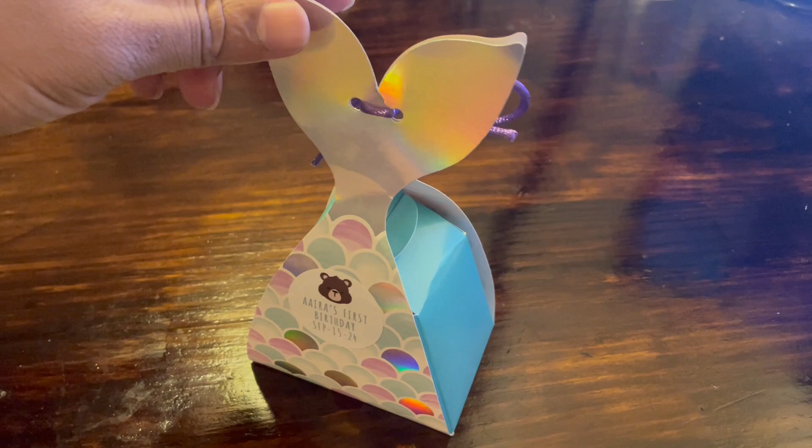Today, I think I'll be working on a new workbench, at least new for my channel. So this is a gift box that my daughter got from a party the other day, and then my wife was asking me, can you model this in your new software? And I said, yeah, I will give it a try.

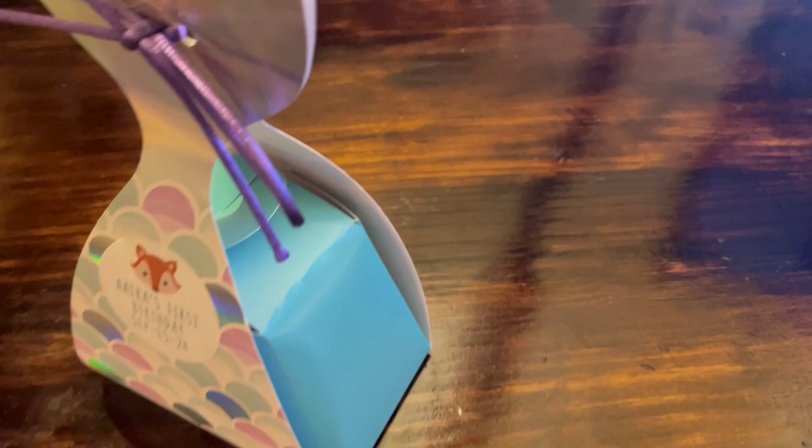So what I want to do is build this box, and it will be done in the SheetMetal workbench. If you don't have the SheetMetal workbench already installed and you'd like to follow through, please go ahead and install it from the add-on manager and just search for SheetMetal, and there it is, SheetMetal workbench. Select it and install it right here, and then you will have to restart the software.

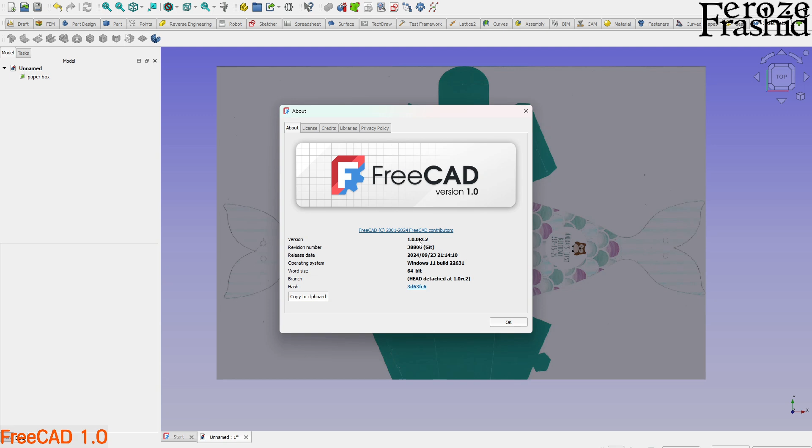Today I am using the new release candidate for FreeCAD version 1.0 release candidate 2, and with that, let's talk about the SheetMetal workbench. So let's forget about these for a minute and let's see how it works.

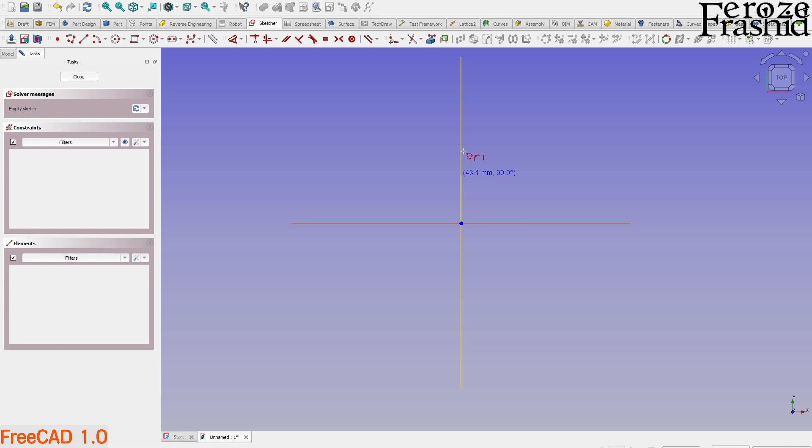I'm going to go ahead and make a very simple sketch. I don't want to make it a rectangle, I want to make it not a regular shape sketch, right? And then I want to extrude that. Because it is a sheet metal, supposed to be very thin, I'm gonna say 0.5 millimeter. This is a trial run. All right, so that's a very thin sheet metal, and we want to bend it somewhere here.

So we'll have to draw a line where we want to bend it, and we can do that in the Draft workbench, or just draw another sketch. Some people are very proficient in the Draft workbench; that comes easy for them. For me, I'll just draw another sketch. Say I want to bend that somewhere here parallel to the edge, something like this, right?

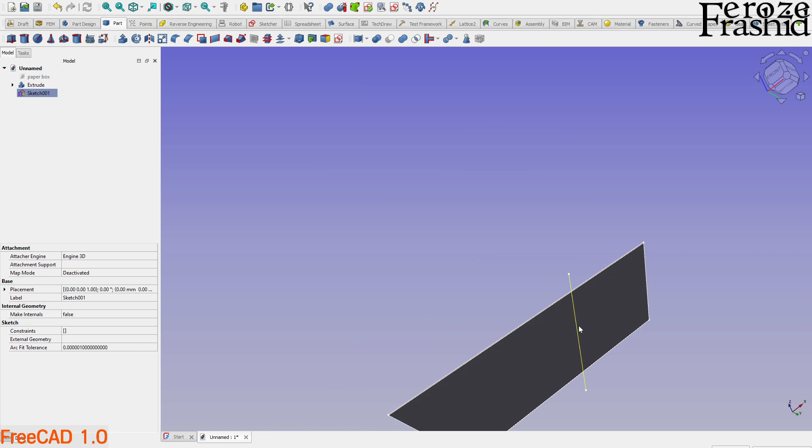One thing we'll have to make sure is that this line is crossing the end of the bending edge. If it was like this, it would not work. We'll have to cross it on both sides, that way the software knows where to bend it. Now I can select this edge and the line, and go to the SheetMetal workbench. So there is the sequential work: select the surface that we want to bend, select the edge, that's the limit, and then come here, it says fold a wall. We do that.

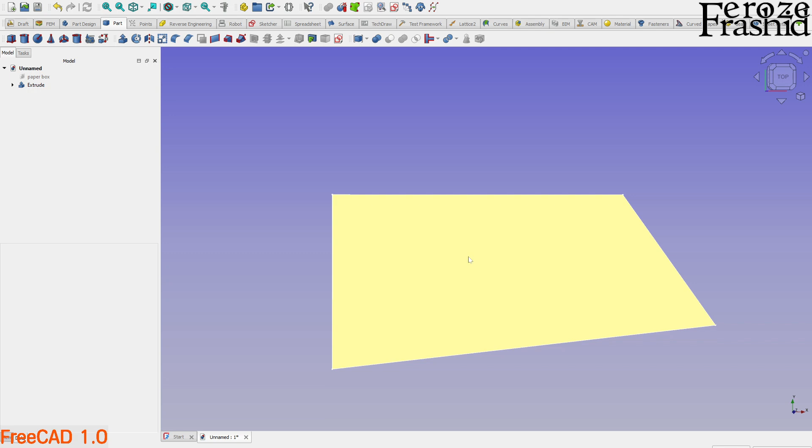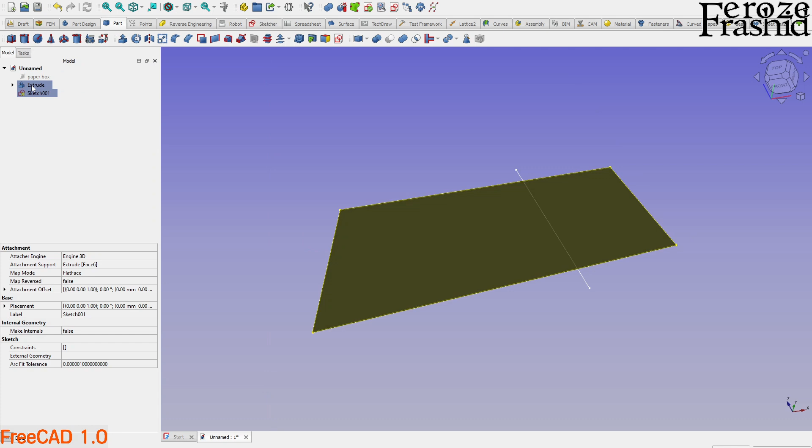Oh, didn't work. All right, so let's do it this way. The last time I just drew that sketch on the XY plane, which was touching this surface. Let's try this. I want to draw that sketch right on this plane. So select that and attach it there. And now draw that edge, something like this, parallel to here. All right, now let's give it a try. Select that surface and then select the line, not the sketch, select the line, and let's give it a try.

Yeah, so it worked. So just any sketch would not do, the sketch will have to be attached to that surface. And I am still not sure which part will bend. Now you see that the bigger part is staying flat, the shorter part is folding over. At what point this side folds over and this side stays flat, I haven't found that out yet, so that's another thing to learn. Maybe on the way we will learn it.

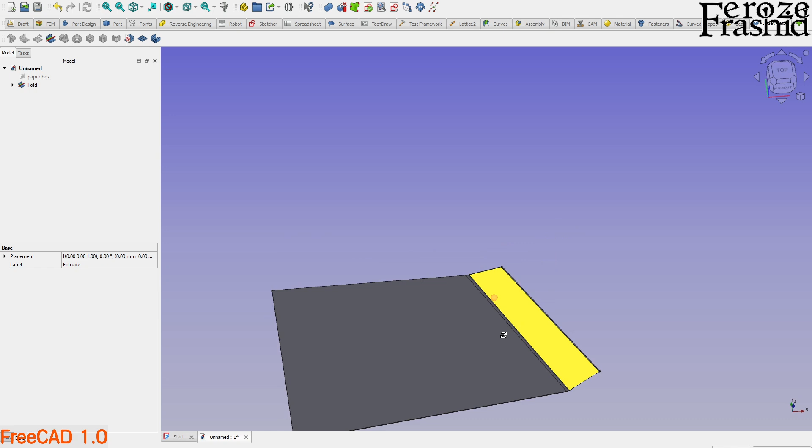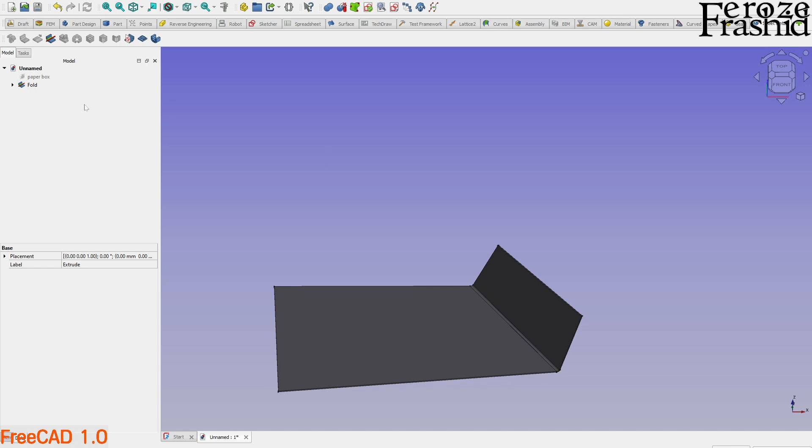But this is the main principle for this video. I'll just draw the sketch, then draw the line, and fold it over and over again until it becomes this box. Along the way we will have to be careful about a couple more things, but we will address them once we get there. So with that, let's start actually working on it. I'm going to delete everything and then bring our paper box back.

And then if you take a closer look, this part is symmetric to this part and this part is symmetric to this part, so we can get away with only doing this part and this part.

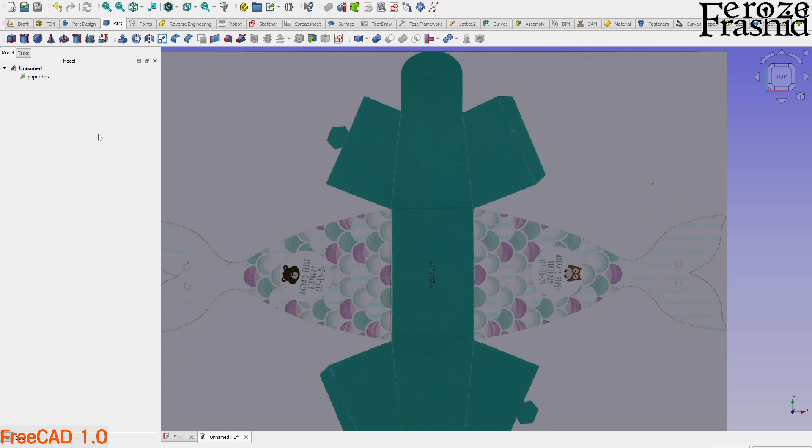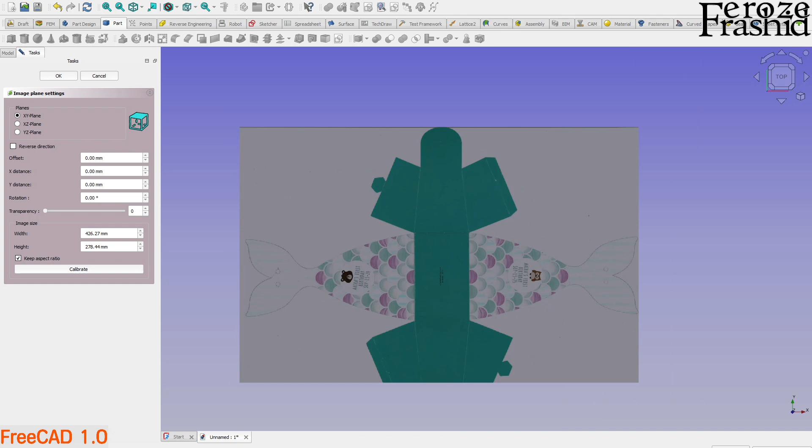So what I want to do, I want to double click on this and calibrate, pick these 2 points as our best guess. And here, oh, it's already calibrated, so 96, pretty cool. And from there I want to say this is 50% transparent, and let's keep that on XY plane for now. There. So we got that.

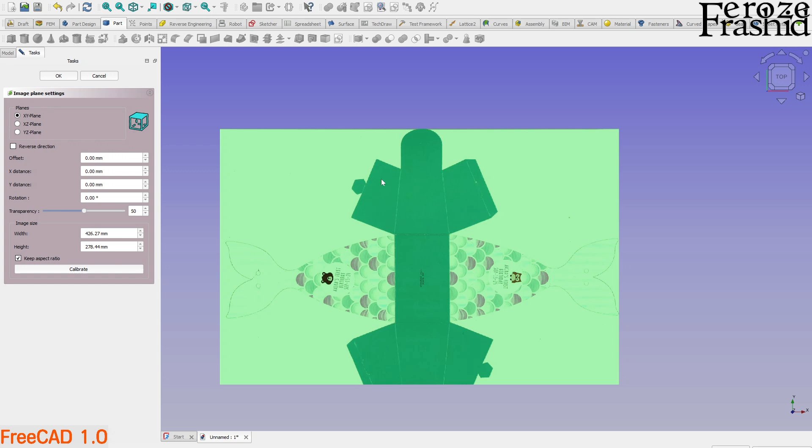And we can verify our work. So again, in the calibration, let's say I want to measure between this point and this point. It's coming around 60 millimeter. And I want to measure that in front of me. Yeah, that's exactly right, 59 millimeter in front of me. So I'll take that as okay, right? So let's not do anything and we are pretty good.

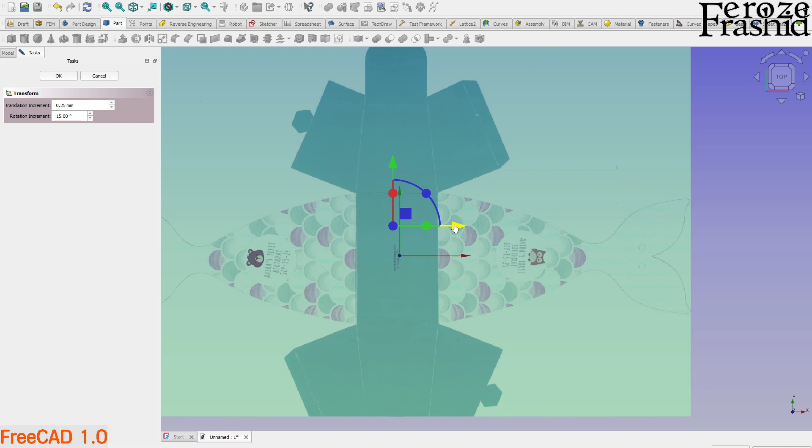Let's see if we will have to rotate this image to square it up, and I'll do that with going to the sketch button on XY plane. And now we can see that this line is not centering. So, oh, I forgot to do that part. So press AC on the keyboard, that brings up this axis cross. Now we can relocate that image to a supposed center, and I don't know where the center is.

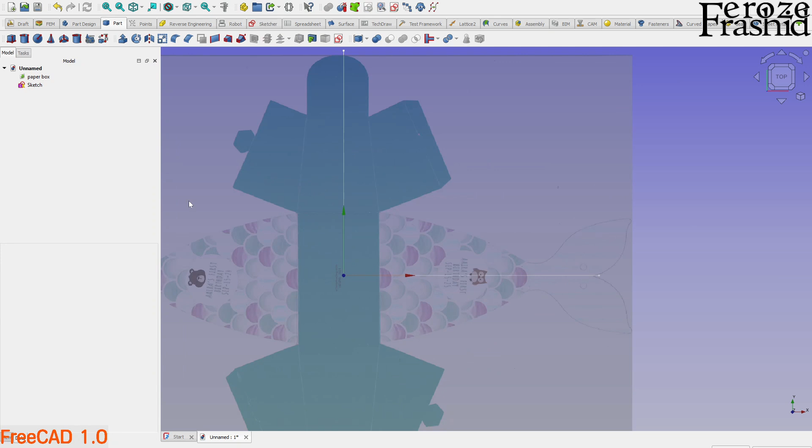So tell you what I'll do is I'll go to the sketch and draw a line just like that, and another line just like that, because the axis cross is not reaching the whole way. Now this line will help us. And now I can actually take that axis cross out of my way and start relocating.

So here, this is the center point, right? And I want to match it. So this is the center of the sketch, and on this side looks fine. On this side it could come just a little bit over. I think that's the best we could do, and that should do for now. So now the image is calibrated and centered. All right, let's get back into the sketch and delete these two.

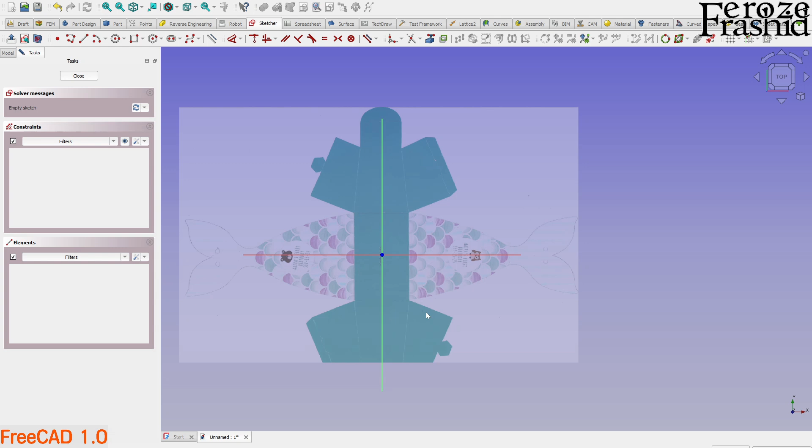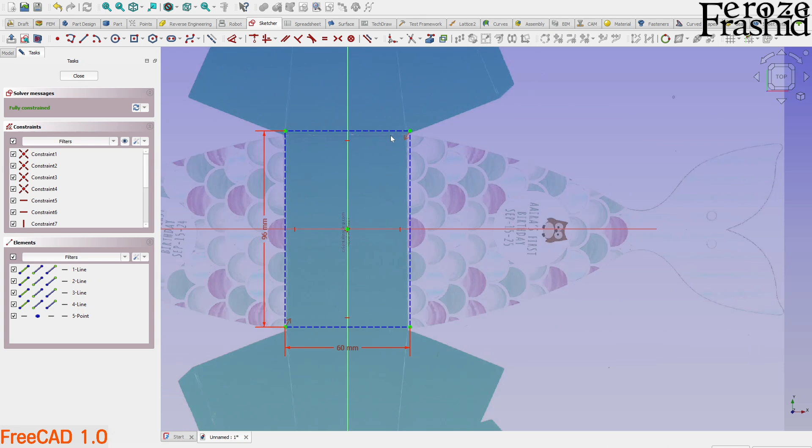So what I will do, I will first find out these 4 corners. So I'll just take a rectangle, centered one, and I'll probably make it construction geometry and do it like this. So this is going to be 60 on one side and 96 on the other side. So those are my four corners supports. Those are matching pretty close. Maybe not right there. On this side, it's matching pretty close. Maybe it was 59. Yeah. All right. So we have all these four corners.

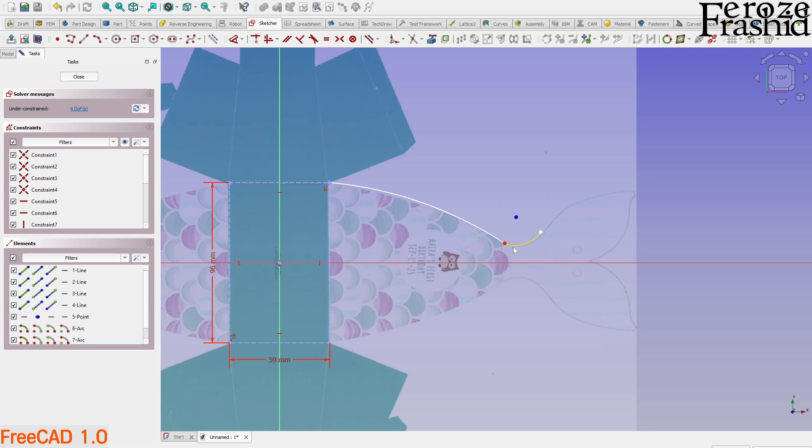Now I want to trace this line, and I will only do this part and this part only. I'm guessing you already know how to sketch or trace a line. So I'll show just a couple lines maybe, and then I'll go off camera and draw the whole thing. I want to draw this line and take another arc, do it like this, and apply some tangency maybe there. And do it all the way around, only this part and this part. So let me work on it for a minute and I'll be right back.

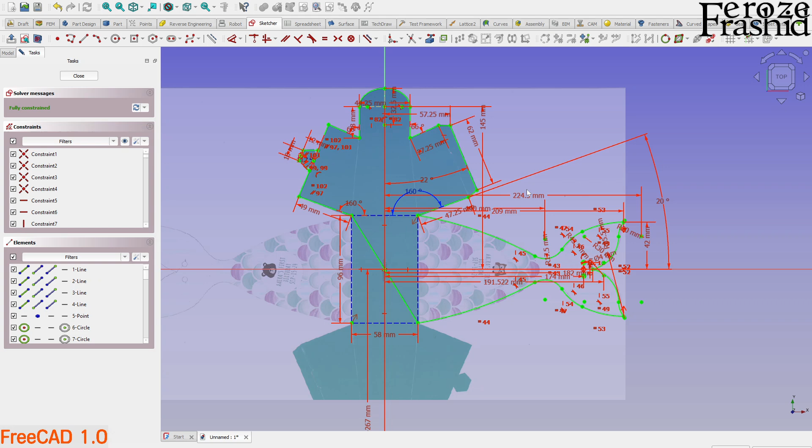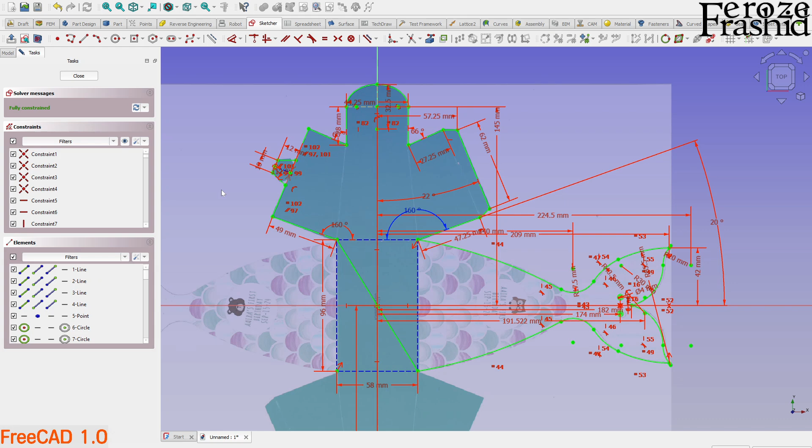All right, so here is what I have. This is the sketch. I tried my best to follow the edge, and there are a lot of constraints in there. So do as much as you can, but it's a fully constrained sketch. But now that I'm thinking, I should have not worried about the constraints this much. If it was only tracing the line and matching there, you can keep it unconstrained and still work on it. All right, let's go ahead and rename that sketch as sketch base, right? And we don't need that paper box anymore right now.

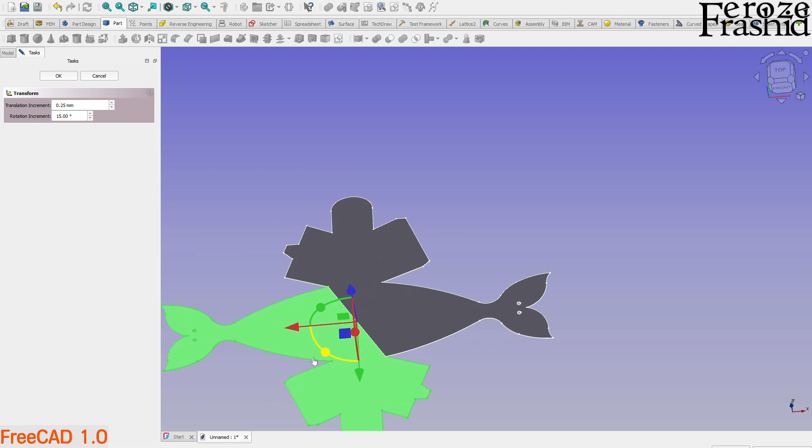Now what I want to do, I want to go ahead and extrude that for say 0.5 millimeter and pull it up just like that. So we have a sheet metal. What I can do is I can clone this part and transform it, so rotate it by 180 degrees, and that will create the whole thing.

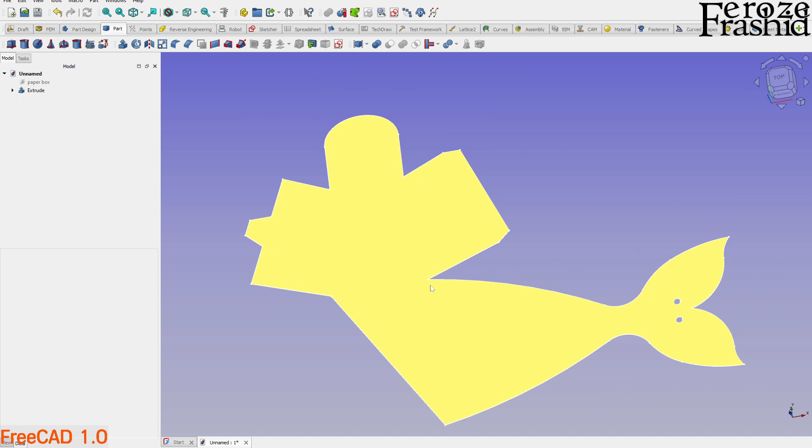With that, let's go ahead and start our bending process. I know, because I wanted to give it a try on another similar model, that we'll have to do a bit more work on this one, but we'll come back to it when we face the problem. So let's say we want to make this first bend here. I want to start from here. So let's see if this point works.

Oh, we don't need that whole thing. I want to draw a line through this point and use that to bend. Right, where is the extrude? Right there. And we have the sketch right here. So we take this surface and this one and make a bend. Oh, it didn't work. I probably know why.

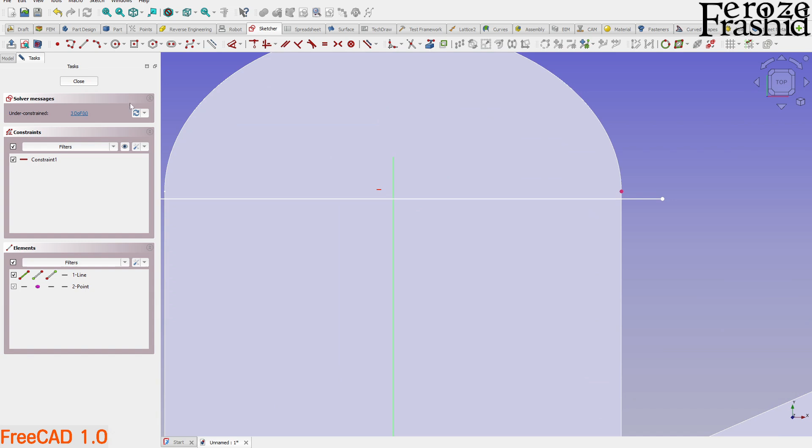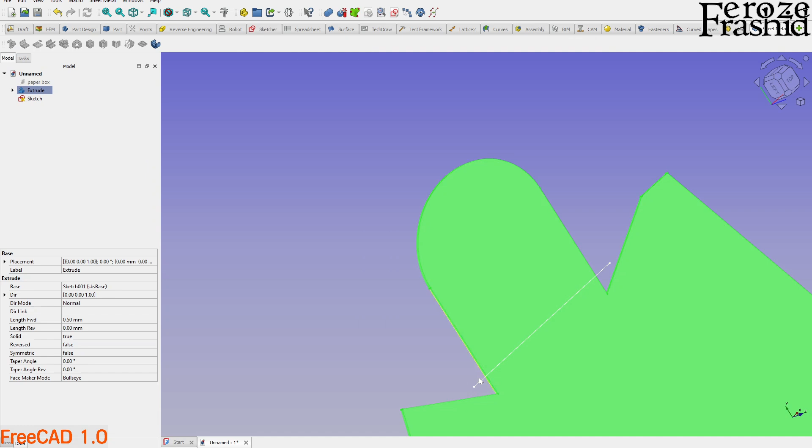All right, let's see. Let's take this point on line constraint off and then bring this line just a little bit over inside, just like that. And now let's try again. It's not working. What if we bring it all the way over here? Oh, it worked there.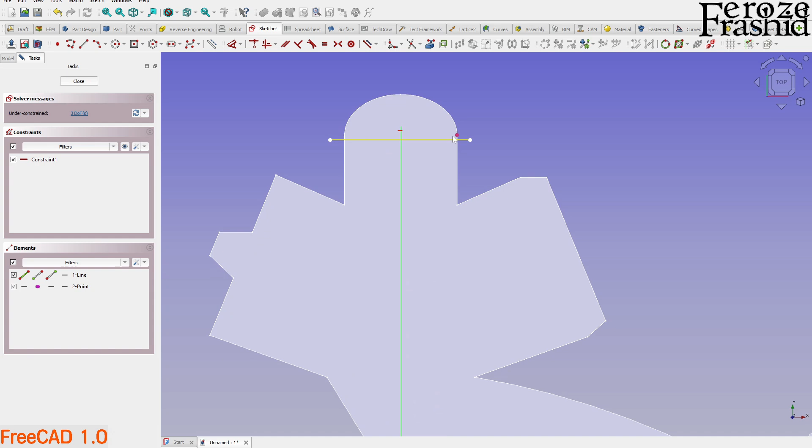So where is the line that's causing this problem? What if we want to push it just a little bit there? All right, so it seems fine when we do it like this. Oh, not there. This is weird. Somewhere here there is an imaginary line we are not supposed to cross. Right, I'm gonna push it as much as I can.

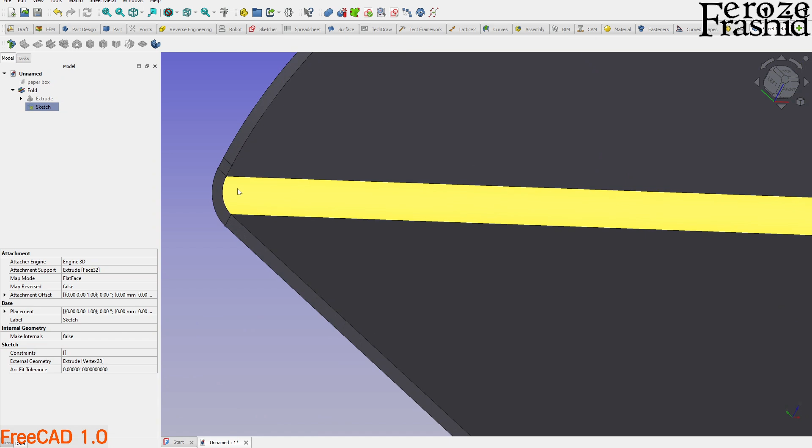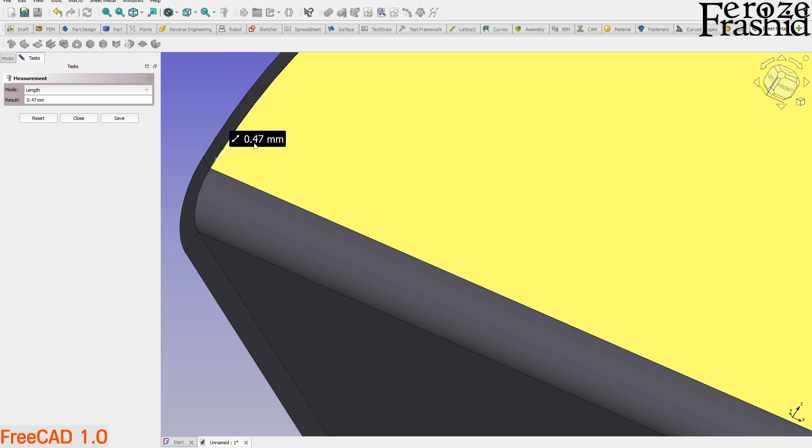So I think you see how this bend cannot pass this point because it's a straight line and this starts a curve, so we cannot take this point past this. I'd be happy if I could do that. So let's see how far more we can go. We can go 0.45 more millimeters. Right, let's give it a try.

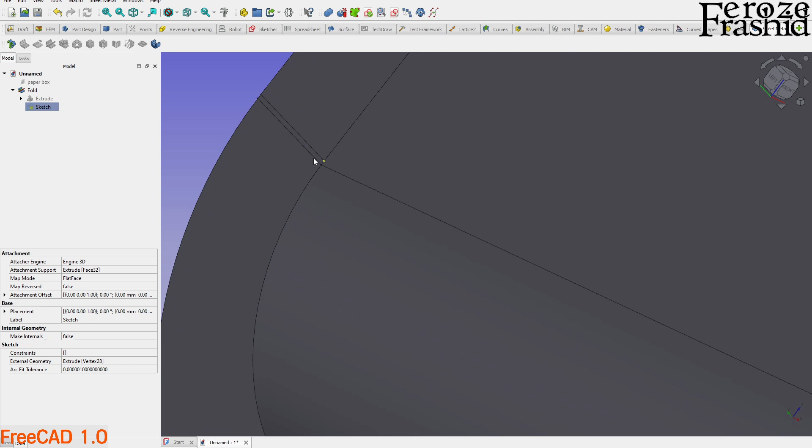So I want to draw another line from here to there, right there, and then I don't want to move this. I want to say this is 0.45. Right, and now I want to bring it closer, just like that. Maybe, yeah. Now I can go ahead and delete these two. Right, so right there, that's our limit. We have to bend it right there. I'm so happy that we figured it out. All right, so one bending is done. We have to do multiple more.

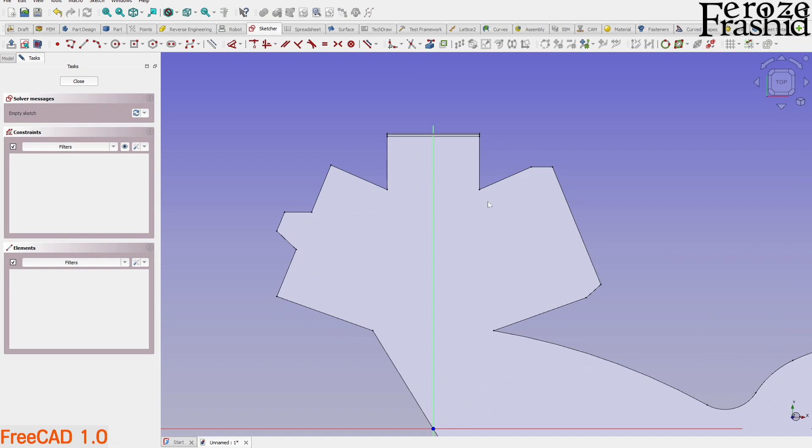So let's keep going. We want to draw another sketch, remember, on the surface. And here I'm expecting another problem, so we will address it when I face it. Let's take this point and this point, and then I want to draw a line because this will be another fold. So as I said, we have to cross it, something like that. If I take it all the way to this point, it's not crossing anymore, but I want to make that line right on that point. So one way to do that is kind of like make a notch right there.

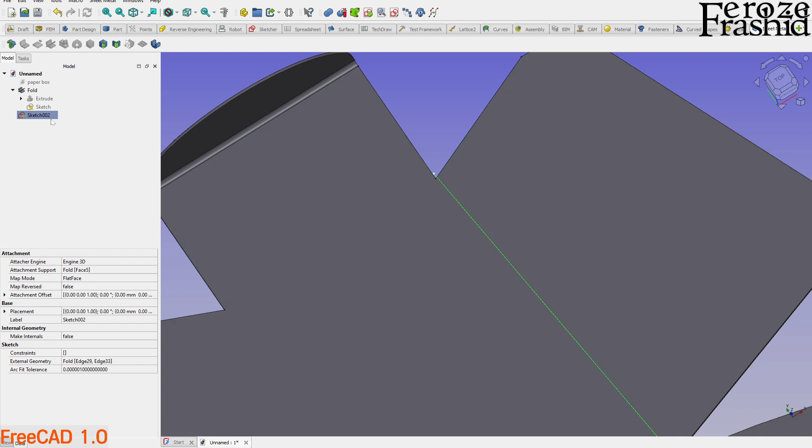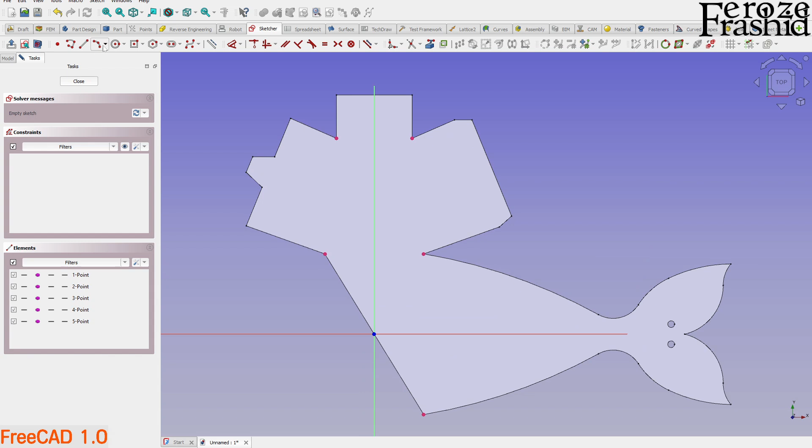And what I was thinking, I want to give it a try. So let's forget about this sketch right now. What I want to do is draw another sketch on XY plane, right? And then take these 3 points. That point, this one and this one, maybe this one too. These are the ones that we want to work on right now. And then let's draw some circles. I'm doing a very small circle, 2.5 millimeter. Oh, it didn't take. So let's just draw a circle.

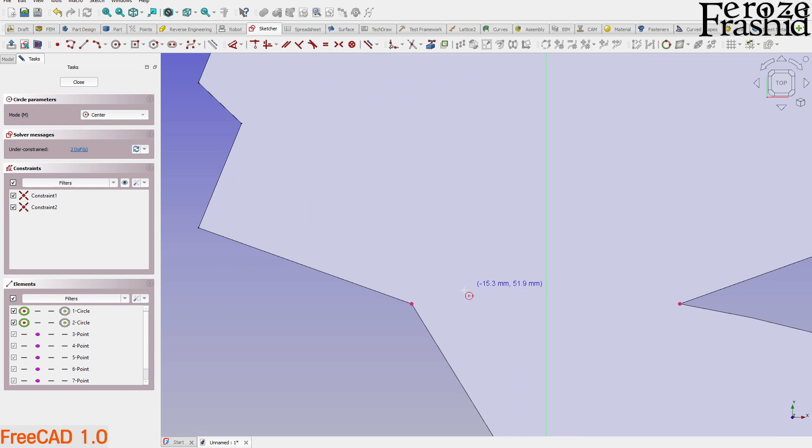And we'll come back to put some dimensions to it. So I want to go ahead and make all of these equal, right? And then one of them dimension, I'd say 2.5 millimeter, very small, maybe just a bit more than that, maybe say 3.5 millimeter. Let's see how far that goes. I want to extrude that, so let's go back to Part workbench and extrude that for like 2 and take it back 2. So now it's going both up and down.

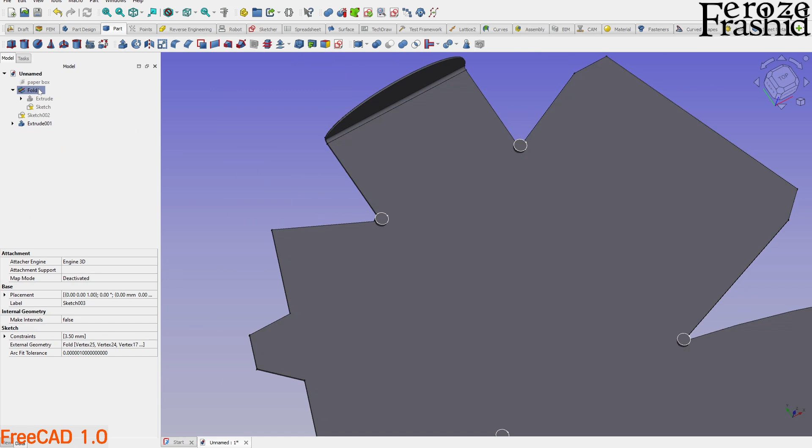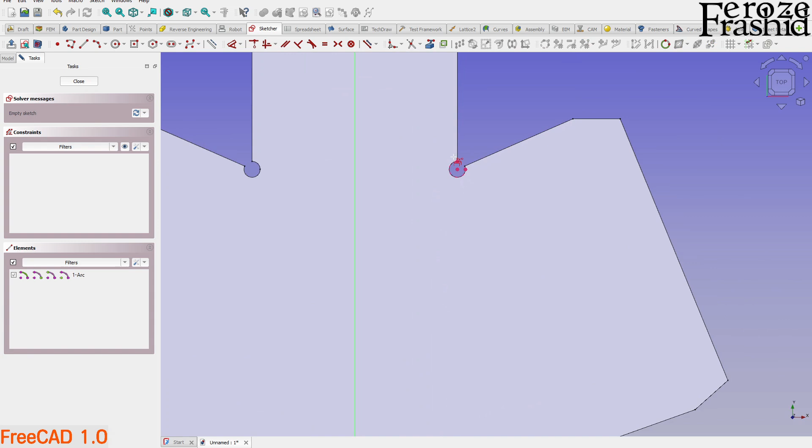I can go ahead and make a cut there. Hopefully at the end of the day it won't show up as an ugly one, but let's see how far we can go. All right, on this one, let's draw another sketch on this plane, and then now I can take this circle as reference and then draw a line between those two centers. Now this should work theoretically.

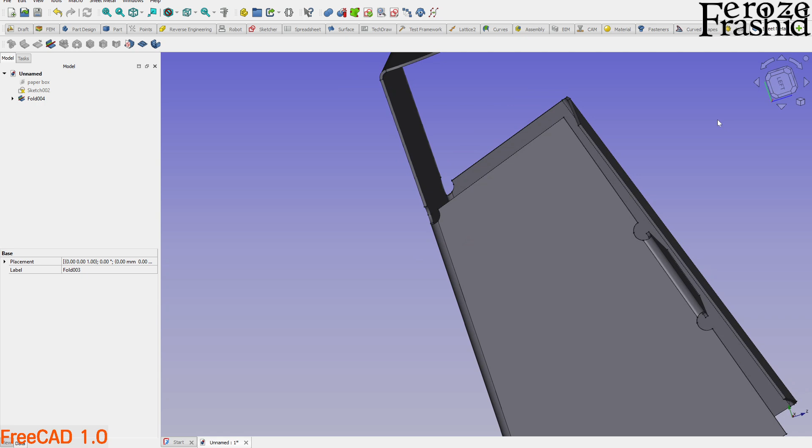So take this and take that line and go to SheetMetal workbench and make a wall. It worked. Pretty good. All right, we're going somewhere. So that part is done. Now I want to bend this, and I wonder if it will be 90 degrees. It won't be 90 degrees, so it will come somewhere here. So let's see how we can measure the, all right, so this says 71.78. That's the angular distance between these two.

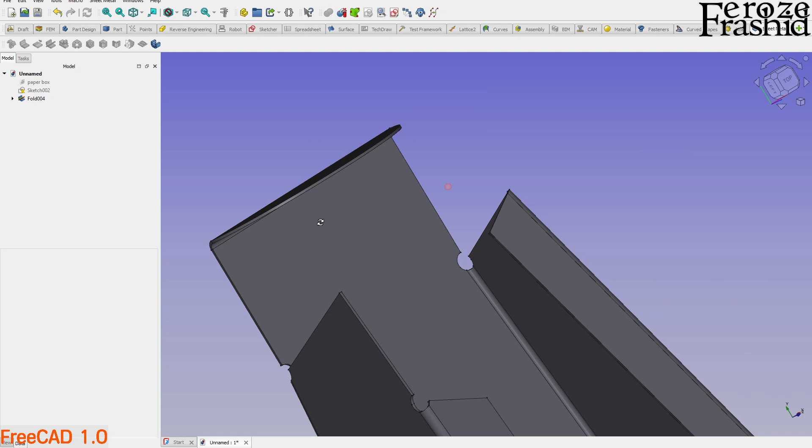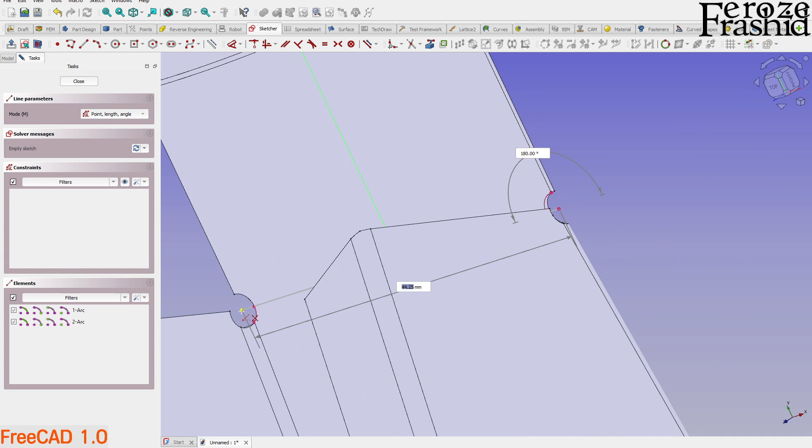So what I want to do, I want to draw a sketch on that surface. Actually, this custom toolbar is paying off. Now I don't have to go to Part workbench every time I want to do that. So I want to take that center reference and then draw a line between those two centers, and then keeping my fingers crossed and doing a bend. Oh, it worked. So always cross your fingers. So now we go 71 degrees, was it? Yes, perfecto. So that 71 degrees kind of helped.

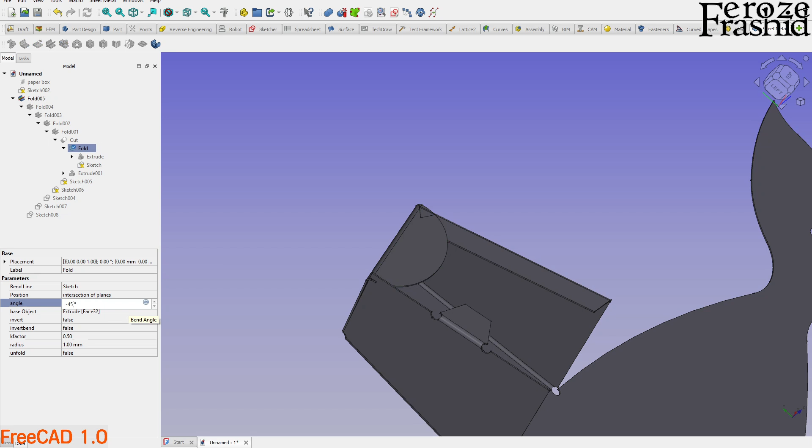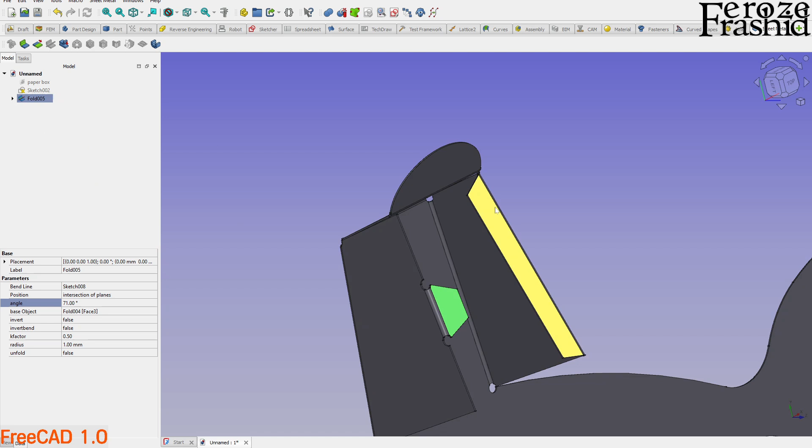I may have done this prematurely. So we will have to go back to the very first fold here, and take this and make this minus 45. Yes, it should go the other way, not this way. I'm so happy this is parametric, so we didn't have to do the same thing again. All right, and also this one. This won't go all the way inside. So I think that's the second to the last. So this is that.

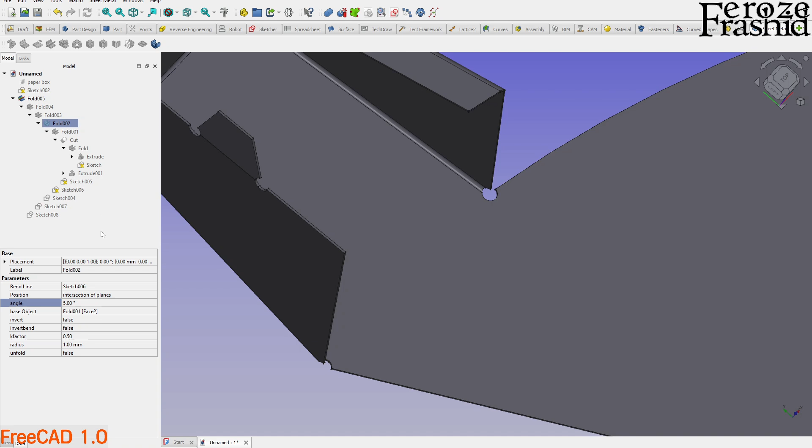So this is going to be only say 10 degrees. Yeah, not that one. Maybe I should have named them. Yes, there. So it should not go all the way. It's just a tiny little bit, maybe 5 degrees. Yeah, just a tiny little bit. All right, and one more bend to do to take it to some place. We'll sketch it and then, actually reference points first, and draw a line between these two.

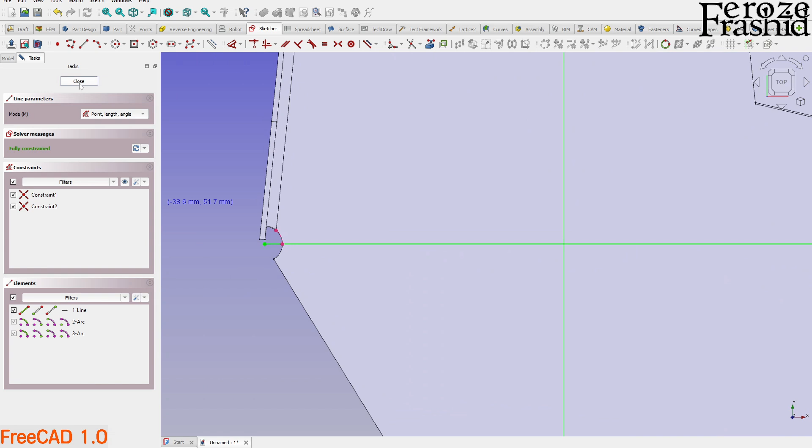All right, and take this and take that line and make a wall. Oh, that is what we were talking about. So remember, so far this was the one laying on the ground. Now on this bend, it just took it the other way. So how is that decided? I would very much like to keep that on the ground, but it doesn't matter anyway. All right, so I see that the gap is not filling up. We've got a couple more degrees to actually go through.

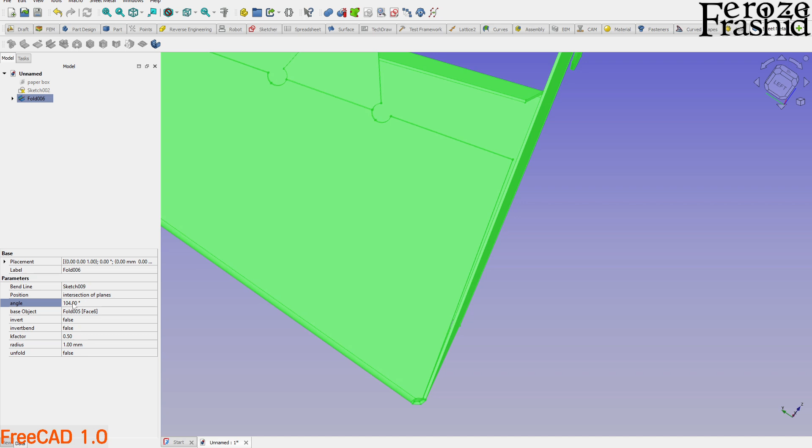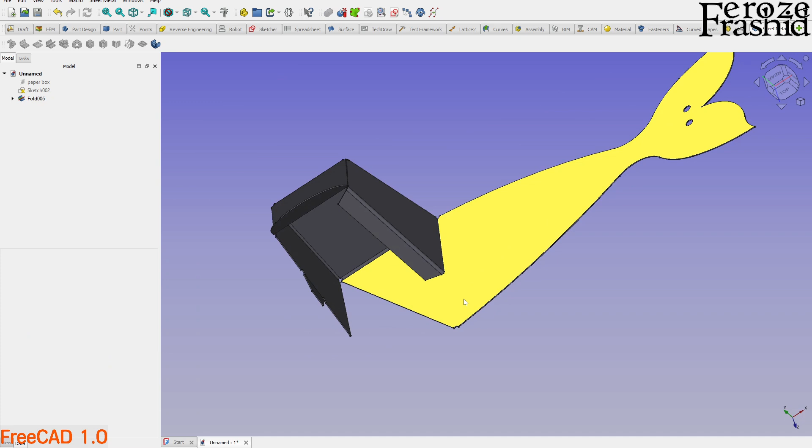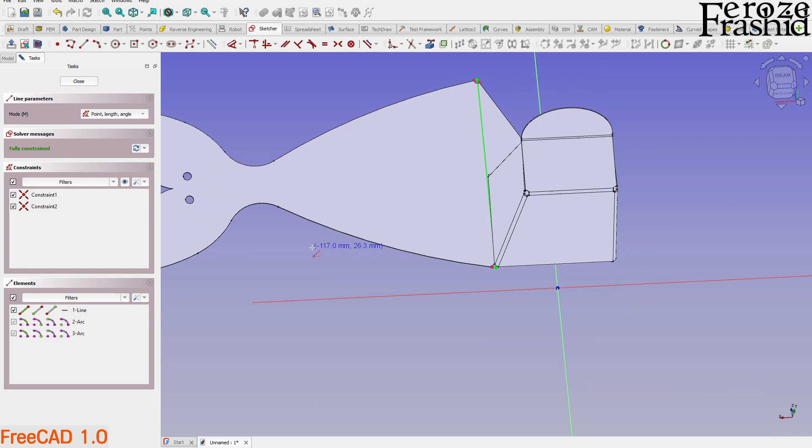If you are using the same model, it's 104 degrees, and then that looks very perfect to me. Yes, that should work. Okay, and there are a couple more here, so bear with me. On this one, draw another sketch, and here I want to take this point and this point and draw a line in between. A lot of repetitive tasks, and take this, take that line and bend. Okay.

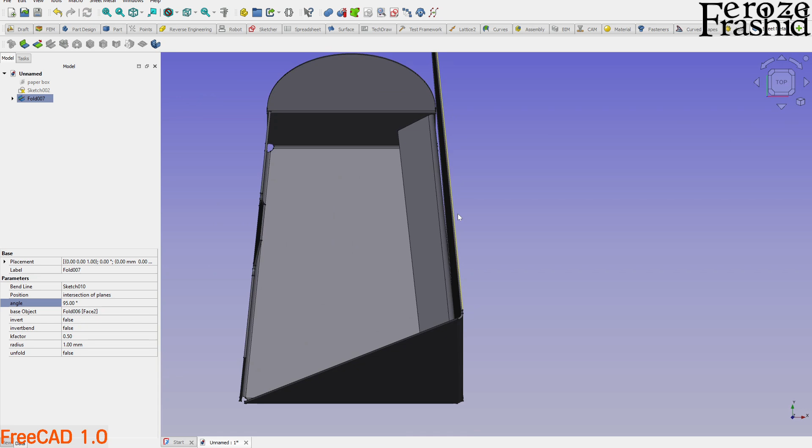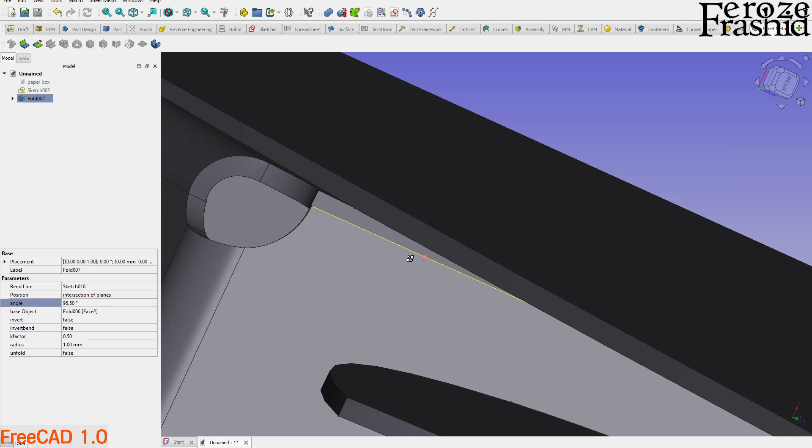Oh, I should have made this one like this as well. All right, so we need to bring it a bit more, maybe 100. Too much, so let's go halfway between 90 and 100. We can take it just a little bit more, 96 maybe. It is kind of getting in there. We don't want that. We want to go at 95.5. Yeah, we like it. It's barely touching, and that's what we want. All right.

And if you remember going back to the first video, this thing comes down here just a little bit, so there will be a lot of bending. I wish. So let me do what I'm going to do. I'm going to go off camera and then draw like 4 or 5 lines here, and then bend it just a little bit, enough so it comes close. All right, I am back.

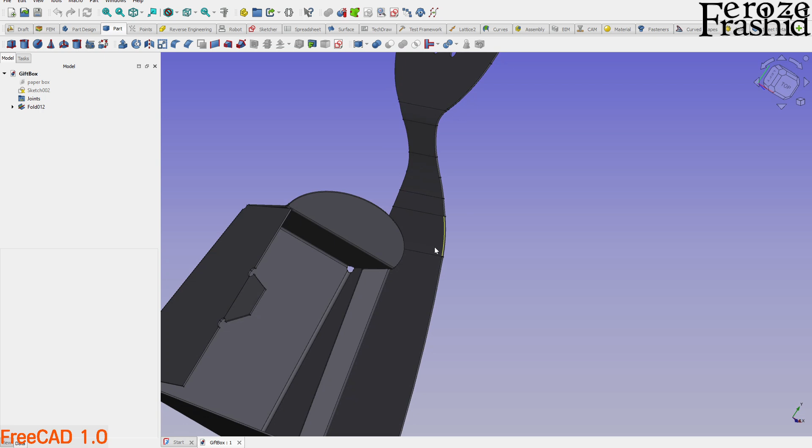What I did is I applied 1, 2, 3 more bends in there, and then I also found out that I could change the radius of the bends that I'm doing. So let's go back to this third one. So here you can see radius is 50. It was 1 first, so the default value is 1. I think that kind of messes up things over there, so we don't want to do that.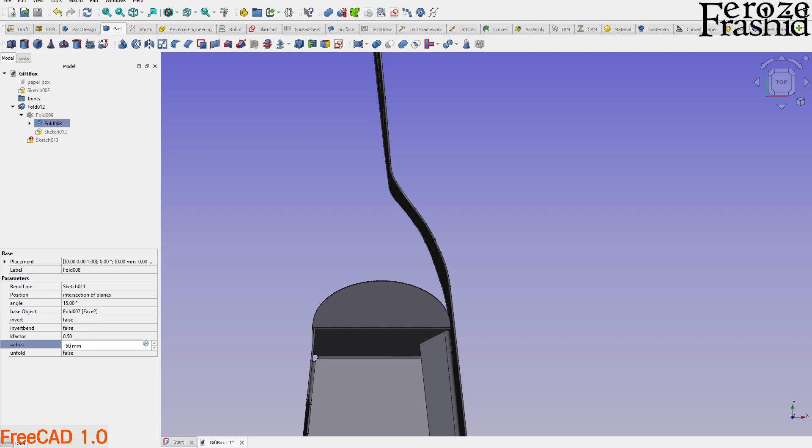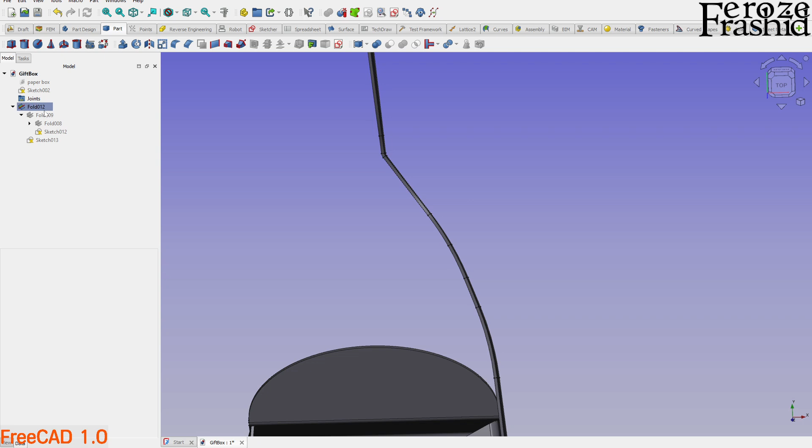So the point is, we can go and make this radius right here. So now it's a sharp bend, but we can kind of correct that curvature. So I was going with 10 here, and that's how I got this curve. I got 3 more sketches right here. All right, so I think this should work.

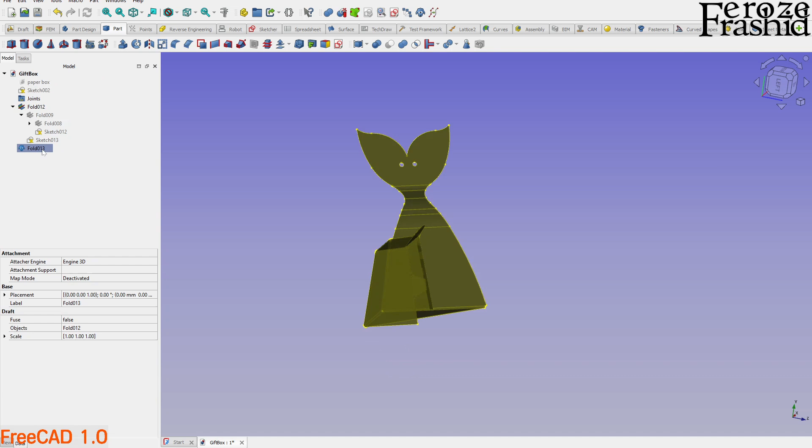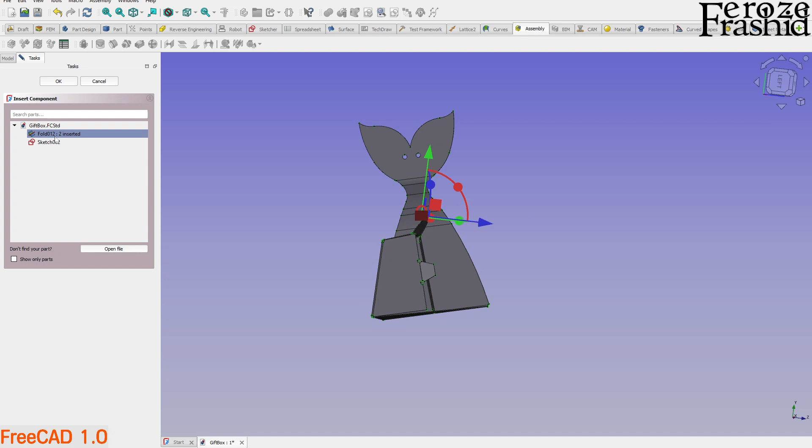Now we'll have to make another clone and try to, okay, do you see what I see? So this is not horizontal anymore, and that's going to be an issue. Maybe we should take a different route. Let's go work with this new assembly workbench, and I'm gonna go ahead and hide this, and then add that. We have only one component, so that's grounded now, and then we add that one more time. Right, and take the second one and move it away.

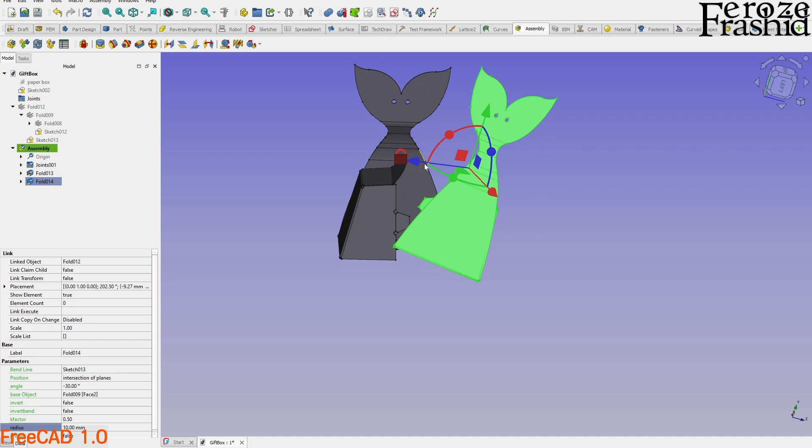So because these two planes are not on the standard plane, first of all, I'm going to make these two parallel. Right. Now where is that? So it kind of pushed back in there. Alright, so now they are parallel. They will stay parallel, they won't rotate. That's good. And then I want to position it kind of like that to make it easy on the software, and then solve again.

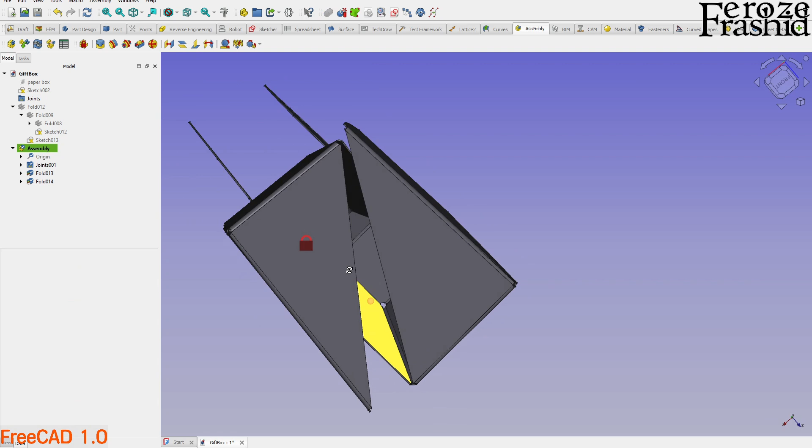Right, so that kind of flattens it out, and let's rotate it just a little bit more on this axis. Yeah, all right, I think we are somewhere. Now what I can do is take this fixed joint and take this surface, this one, and take this surface. So it's a very thin surface, we'll have to zoom in, and since we take that 2, that kind of blends in. I hit OK, so that's fixed there.

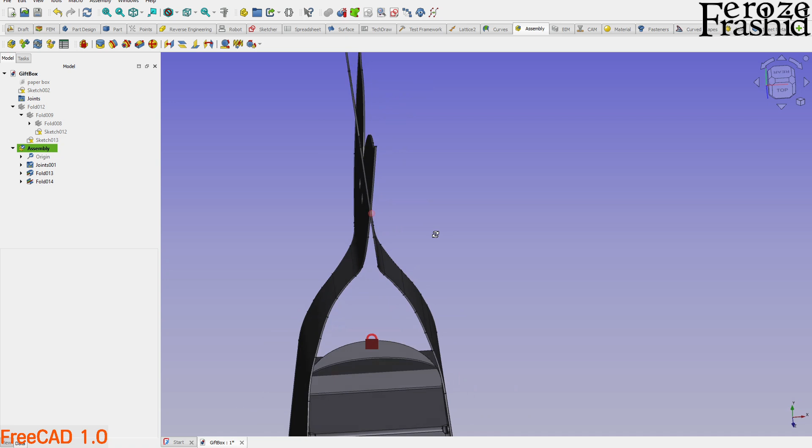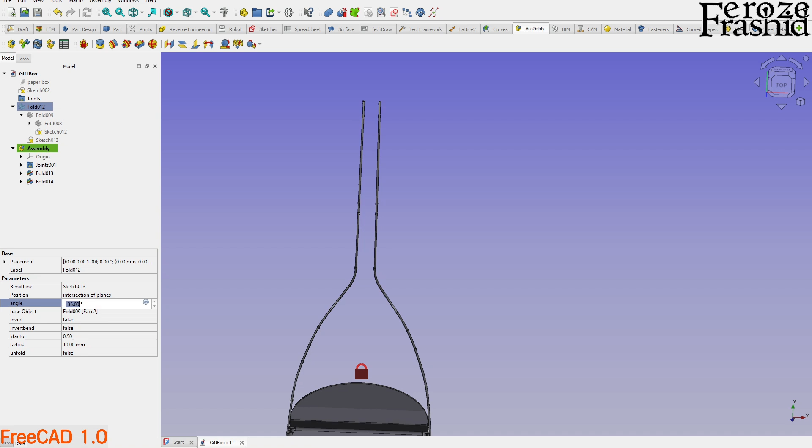And I see a problem right away. These two flaps should not cross each other. So we are almost there. I want to go into that fold 12, and where it says minus 30, let's make that minus 35. Yes, maybe minus 32. Yeah, I'll take that. All right, it is still touching, so maybe we should bend that somewhere. I don't think so. It's already a long video, so I'm just gonna make it minus 31, and no, the other way, minus 33.

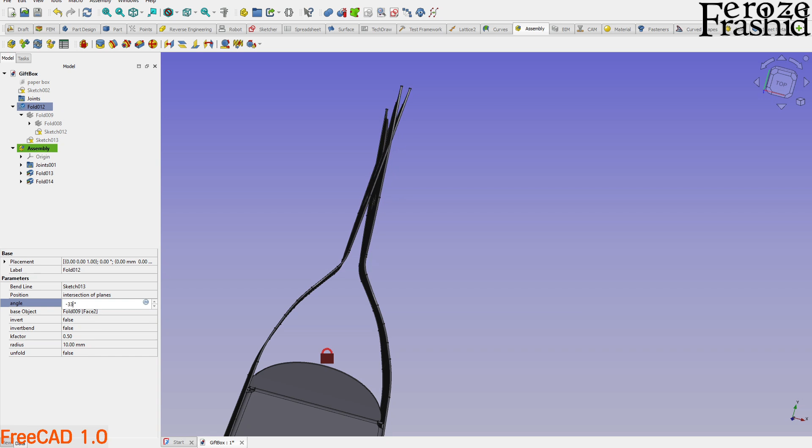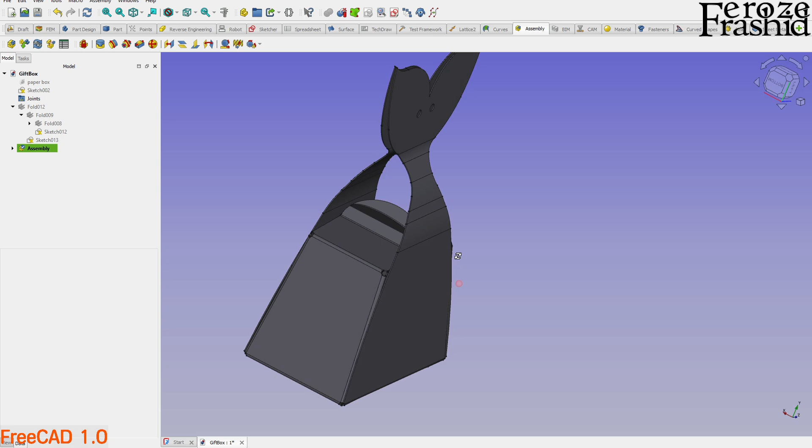Yes, and say that's a satisfactory bend, and then we can throw some lines in there and make a bend, but that is the target. So we have this box, and now this is right there. It's a half cut, and then it will get into one another, kind of like bends it. So that's a gift box. Let me hide this. That's a gift box made out of a thin metal sheet in the Sheet Metal Workbench with the help of assembly. We didn't have to do the assembly workbench. To be honest, we could probably do some finagling on the clone and put it together, but for this case, putting it together via assembly was much easier for me.